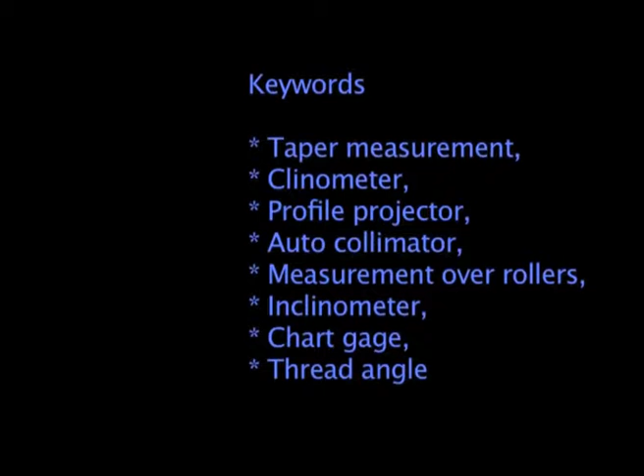In the last lecture, we discussed different kinds of instruments used for measurement of taper. We discussed bevel protractors, sine bar, sine center and sine table. In this lecture number 2, we will continue the discussion on other instruments used for measurement of taper, angle and tilt.

In this lecture, we will cover: external taper measurement using two rollers of same diameter, internal taper measurement using two balls of different diameters, and then we will learn about the clinometer, profile projector and auto collimator.

Now let us start the discussion on external taper measurement using two rollers of same diameter. In this photograph, you can see the tapered component, a taper plug gauge. The taper angle of this is to be determined.

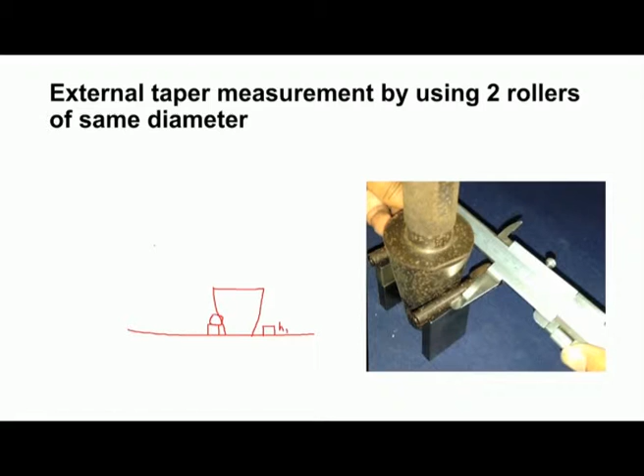We have the surface plate on which we keep the tapered component, and then we keep slip gauges of equal height, say height h1, over which we keep two rollers of same diameter. The rollers should contact the tapered component, and then we take the measurement over the roller. So this is M1.

Then we change the height, and again we keep two slip gauges of different height H2, and over these slip gauges again we keep the rollers. These two rollers should be in contact with the taper component, and over the roller we take the width M2 using a vernier caliper or any other appropriate instrument. Then using the relationships, we can find the angle theta.

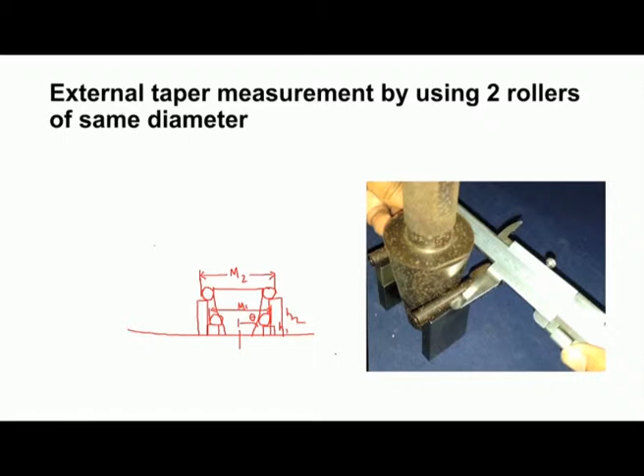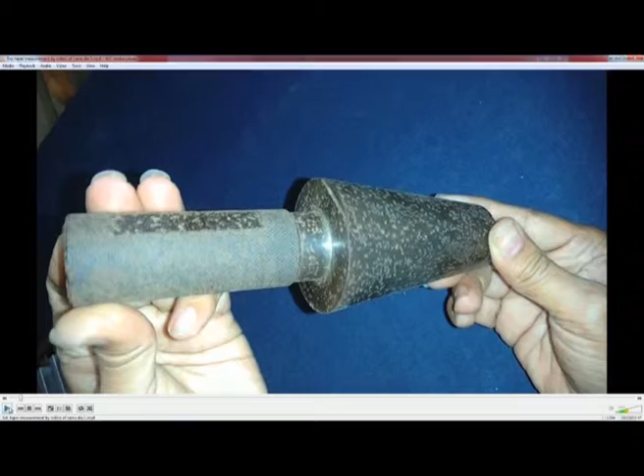Now we will conduct an experiment on external taper measurement by rollers, using rollers of same diameter. Now we can see the tapered component. The taper angle of this component is to be determined.

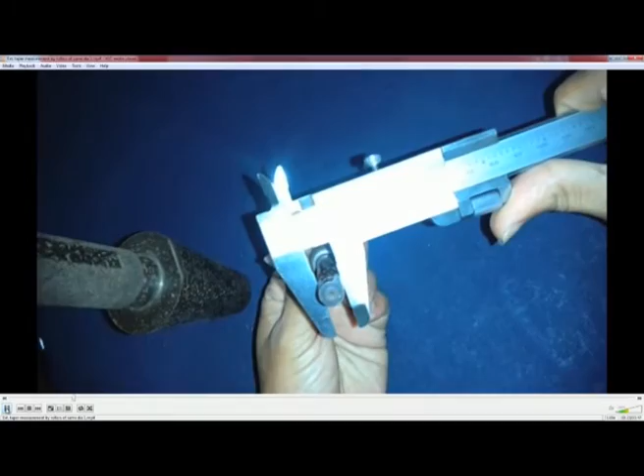Now we have to take two rollers of same diameter. We should note down the diameter of the roller. In this case, the diameter of the roller is 10 millimeters. So we have two rollers of same diameter.

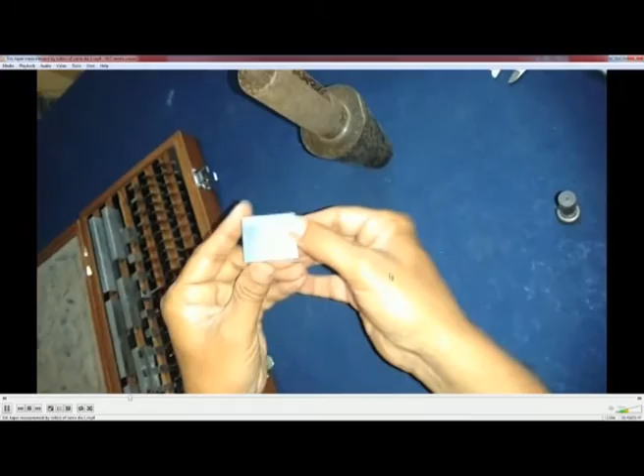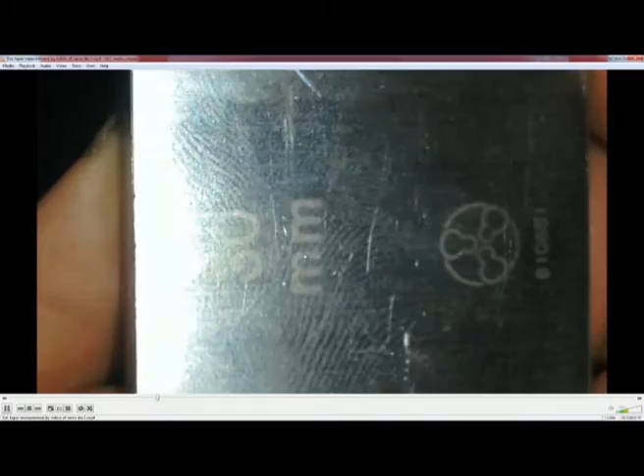Now we have a slip gauge of 30 millimeter height. We are taking two slip gauges of 20 millimeter and 10 millimeter thickness. We have to wring them together to build a height of 30 millimeter. And then we keep the two slip gauges.

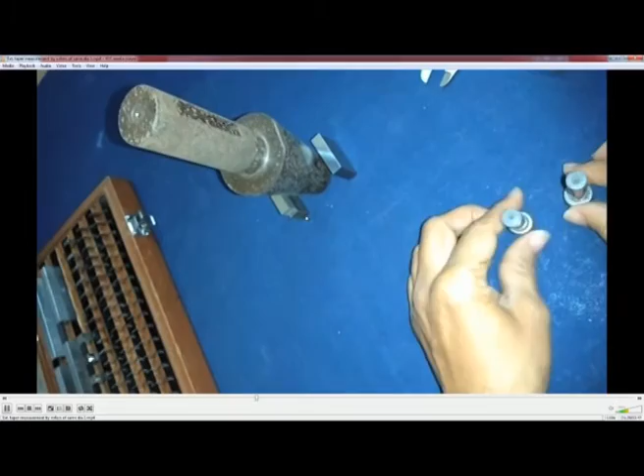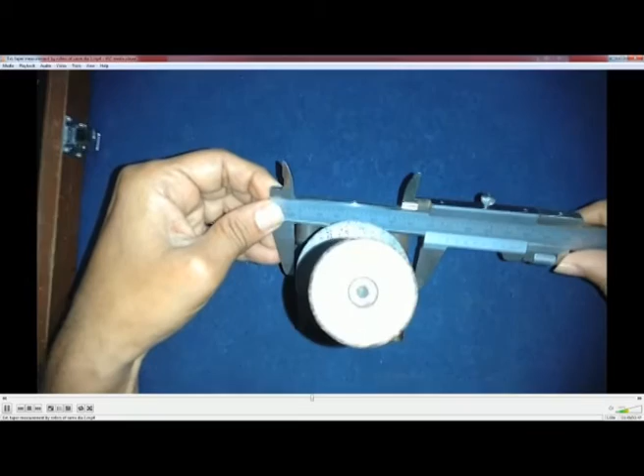Over the slip gauges, we place the two rollers such that they contact the tapered surface of the plug gauge. Now we have to take the measurement over the rollers. So this is M1.

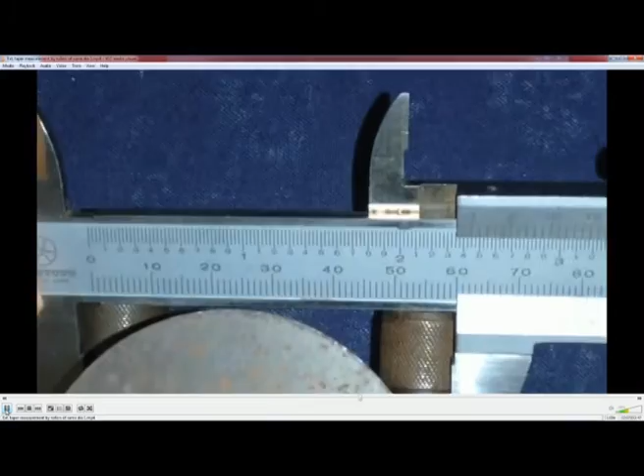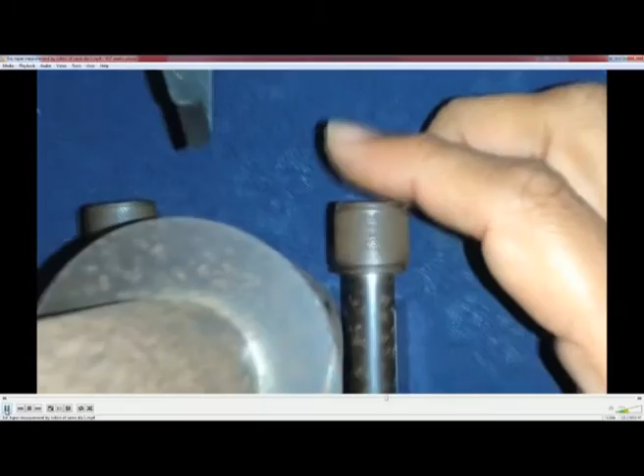I can see the reading is 62 millimeters. Reading is 62 millimeters.

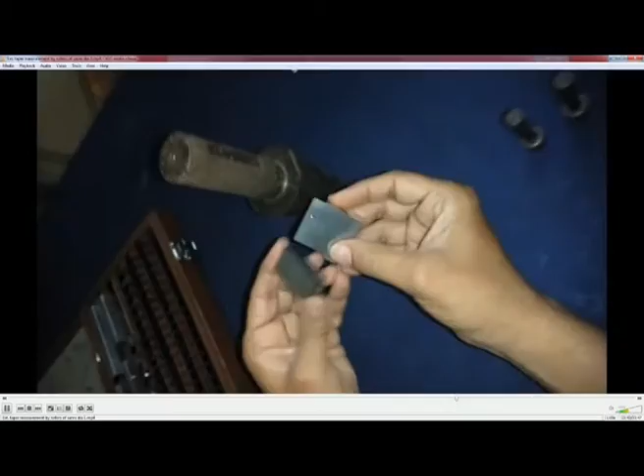Now we have to take another set of slip gauges. We are ringing two slip gauges of 30 millimeter and 20 millimeter thickness, so total height is 50 millimeter. So another slip gauge of 50 millimeter height.

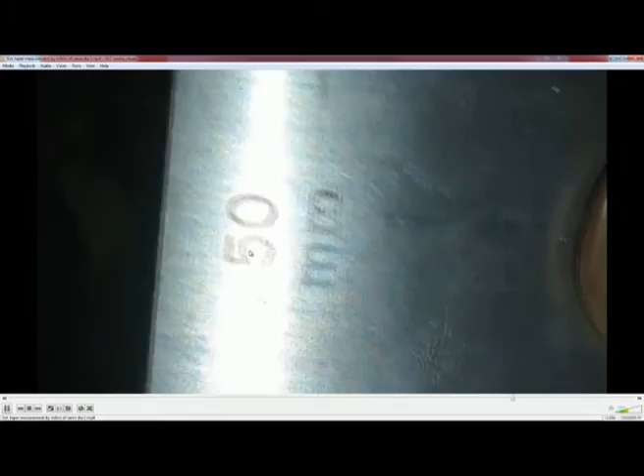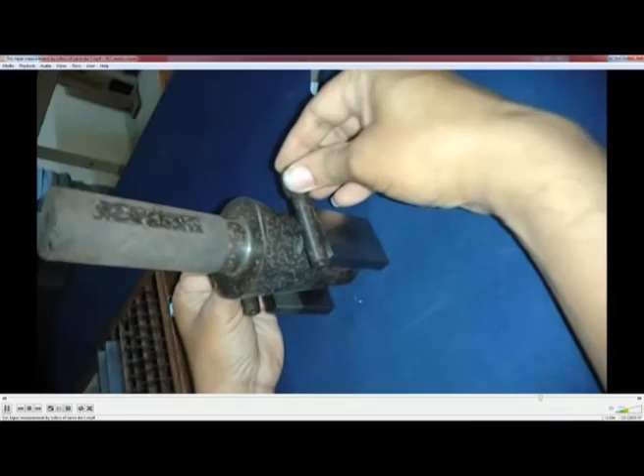Now we have to keep the two rollers on the slip gauges of height 50 millimeter, and over the rollers we take the measurement.

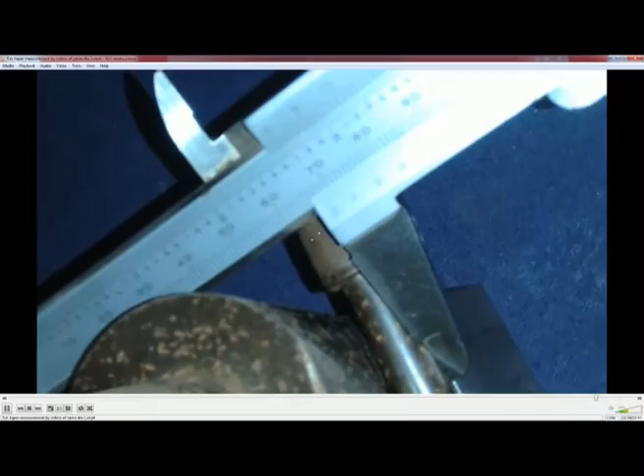Now the reading is 65, 66, 67... 67, and then we have to see the coinciding division. So the vernier reading is 67.8 millimeter.

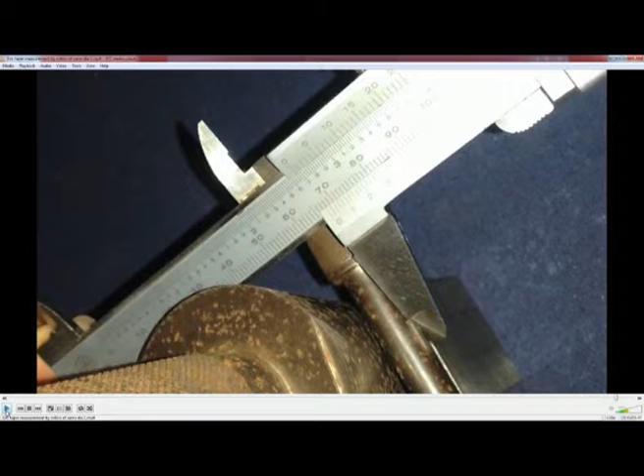Now we have recorded the observations. The roller diameter is 10 millimeter, and difference in height of slip gauges is 50 minus 30 equals 20 millimeter. Width over rollers at a height of 55 millimeter: that is 50 millimeter height of slip gauge plus 5 millimeter roller radius, so total height is 55 millimeter. At a height of 55 millimeter, the measurement over roller is 67.8 millimeter.

Similarly, width over rollers at a height of 30 plus 5 millimeter, that is 35 millimeter height, is 62 millimeters. So the taper angle is 16.5 degrees, that is 16 degrees 30 minutes, which is the taper angle of the component.

Now we will learn internal taper measurement by two balls of different diameters, using a depth micrometer. You can see the photograph here: this is the tapered component having internal taper, and we are using a depth micrometer along with two balls of different diameters.

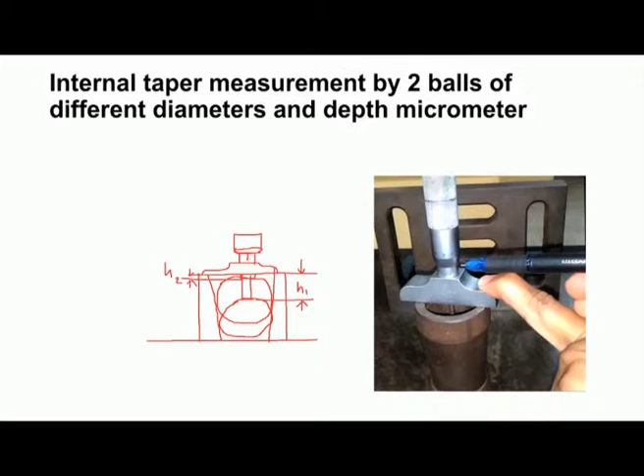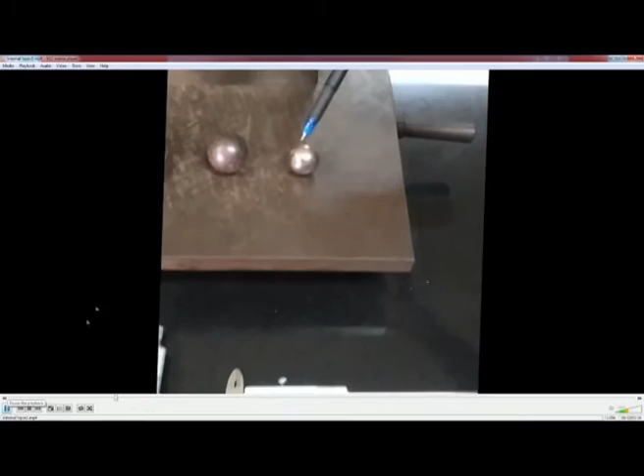Now we will conduct an experiment to learn the measurement of internal taper of a component. Now you can see the measurement arrangement. We have two balls of different diameters, a tapered component with internal taper, a depth micrometer with different spindles of different size, and a vernier caliper for measurement of diameter of balls.

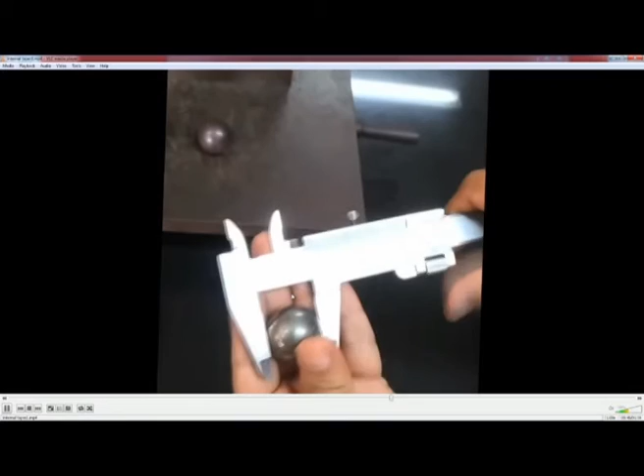Now I am measuring the diameter of the balls. You can see the diameter is 25 millimeter, and then we have to see the coinciding division. Now the diameter of the second ball.

You can see the tapered component. We have the internal taper.

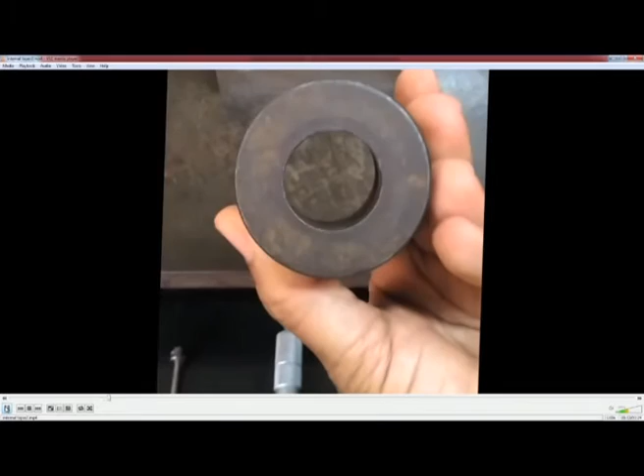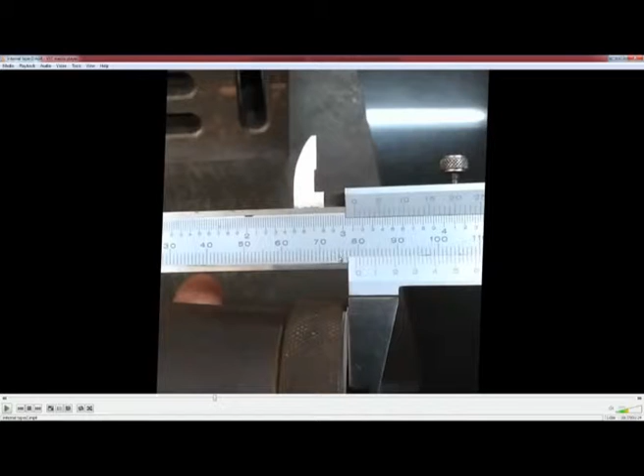I am measuring the total height of the component. So it is 79 millimeter on the main scale, and then we have to see the coinciding division: 5, 10, 15, 20, 25 - the 25th division is coinciding. So 25 into 0.02, that is 0.5. That is the total height of the component, 79.5 millimeter.

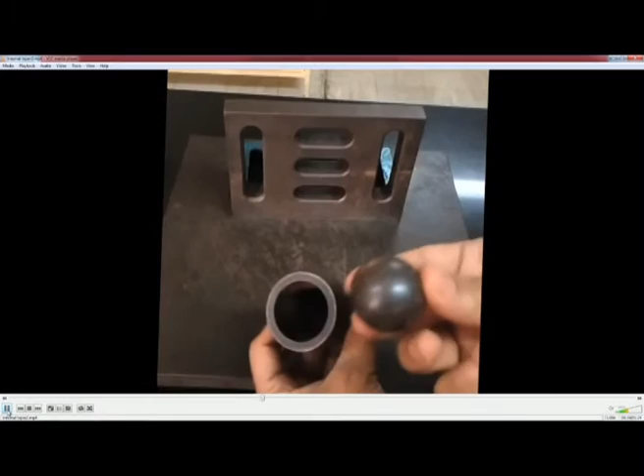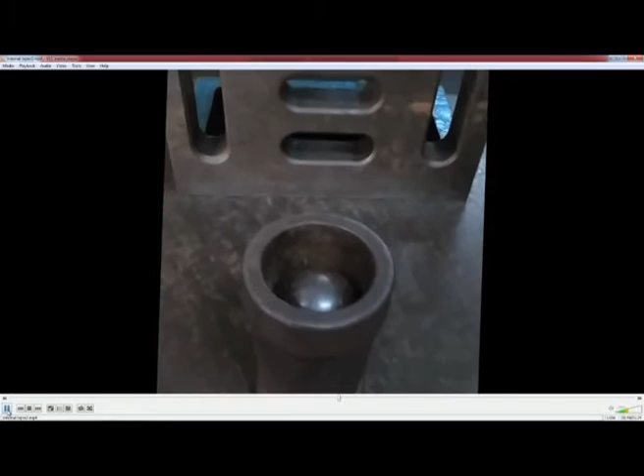Now we have to keep the ball in the internal tapered component, and then measure the height of the topmost point from this reference surface, and record what is the reading. You can see the spindle is just touching the top point on the ball. Then we have to note down the reading.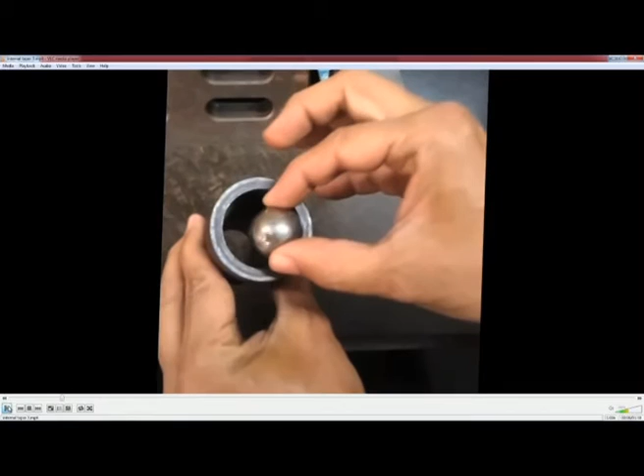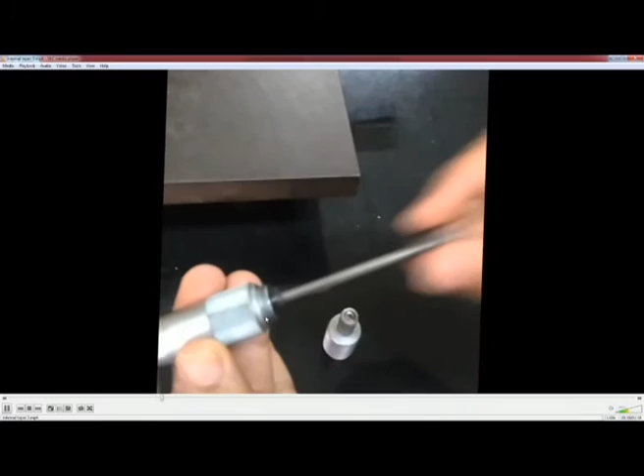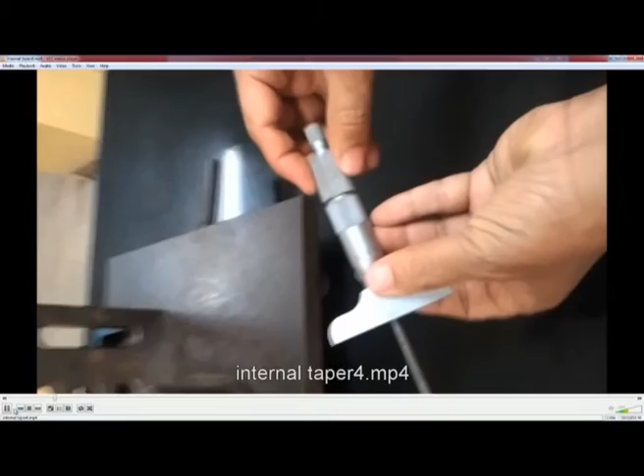Now we have removed the bigger ball, and now I am keeping the smaller ball into the tapered hole, and then again we have to measure the depth. I am changing the spindle, and putting the spindle of longer length. Now we can see I have inserted the spindle of longer length into the micrometer. Now I am measuring the depth. We have to note down what is the reading.

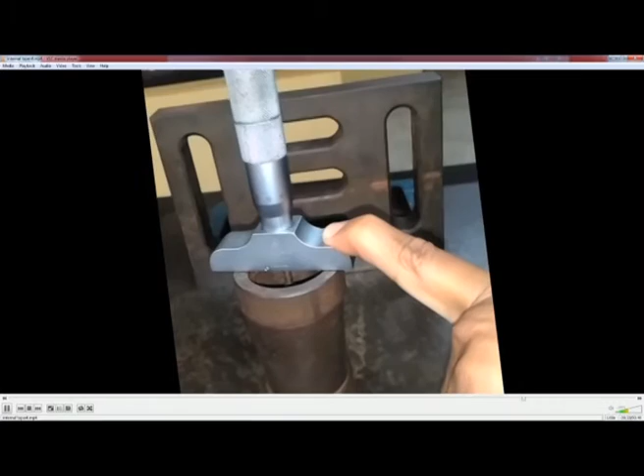Now, these are the observations after conducting the experiment. The diameter of the smaller ball is 25.4 millimeter, so the radius of the smaller ball r is 12.7 millimeter. Diameter of the bigger ball is 31.7 millimeter, so the radius of the bigger ball is 15.85 millimeter. Depth with the bigger ball is equal to 9.05 millimeter. Depth with the smaller ball is equal to 51 millimeter. So height of the component is 79.3 millimeter.

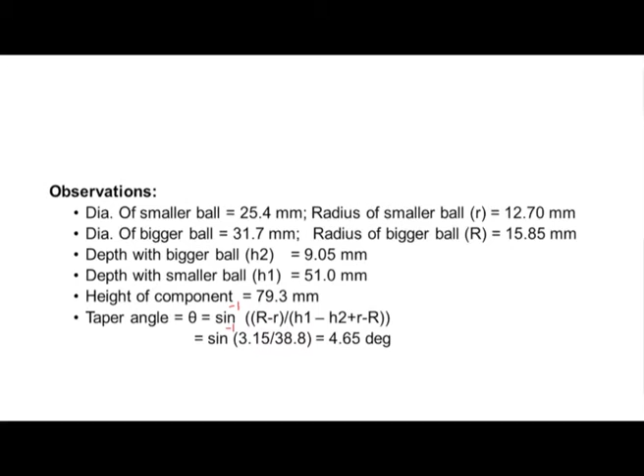So now we can calculate the taper angle using this relationship. So we get taper angle of 4.65 degrees.

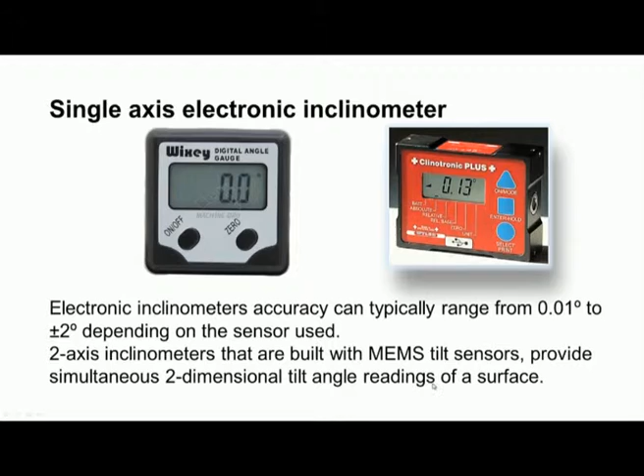This is another instrument with better accuracy. These electronic inclinometers' accuracy can typically range from 0.01 degree to plus or minus 2 degrees depending upon the sensor used. 2-axis inclinometers built with MEMS tilt sensors provide simultaneous 2-dimensional tilt angle readings of the surface, eliminating tedious trial and error when using single axis levels to adjust machine footings to attain a precise leveling position. 2-axis inclinometers can be digitally compensated and precisely calibrated for non-linearity for operating temperature variation, resulting in higher angular accuracy over a wider angular measurement range.

These 2-axis inclinometers with built-in accelerometer sensors generate numerical data tabulated in the form of vibration profiles. It enables machine installers to track and assess alignment quality in real time and verify structure positional stability by comparing machines' leveling profiles before and after setting up.

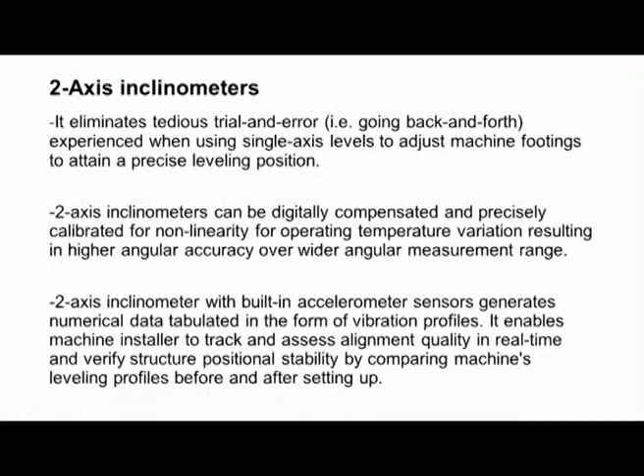Now let us move to another very important instrument used for measurement of angles, that is profile projector. This profile projector, optical profile projector, is a versatile instrument widely used in many phases of quality control. It has made possible the effective measurement of great numbers of components which, because of size or dimensional characteristics, pose serious difficulties to other measurement methods.

For example, if the workpiece is very fragile or very thin, it is not possible to use other types of instruments for measurement of such a component. In such cases, this profile projector will be very useful. So these are also known as contour projectors, optical comparators, shadowgraphs, micro projectors, etc.

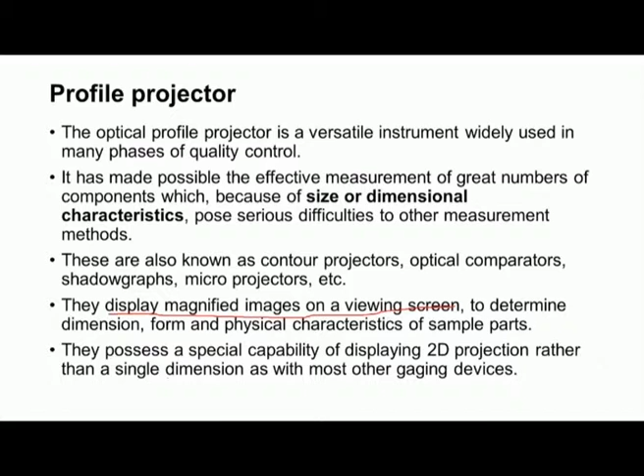They possess a special capability of displaying 2D projection. Other instruments like micrometer or vernier measure only one dimension at a time, whereas these profile projectors at a time can display a 2D projection rather than a single dimension as with most other gauging devices.

Now these tables, in some cases, are stationary, and in some models they are movable. We can move in the x direction or y direction, that is, parallel to the column or perpendicular to the column. Sometimes they can be rotated. This rotatable table is very useful when we use the optical projector for measurement of angles, for example screw thread measurement. And sometimes the work tables can be moved up and down for proper focusing.

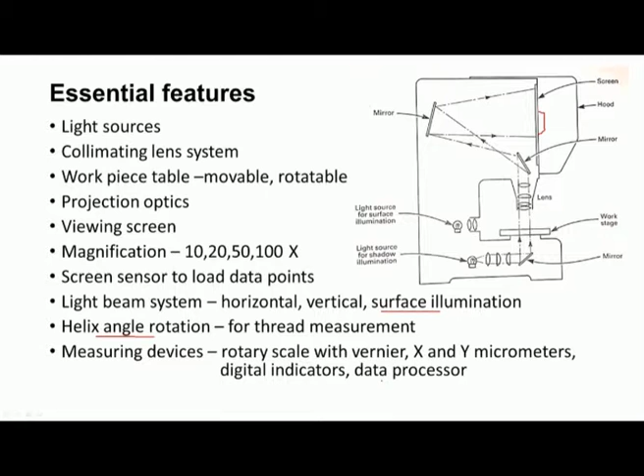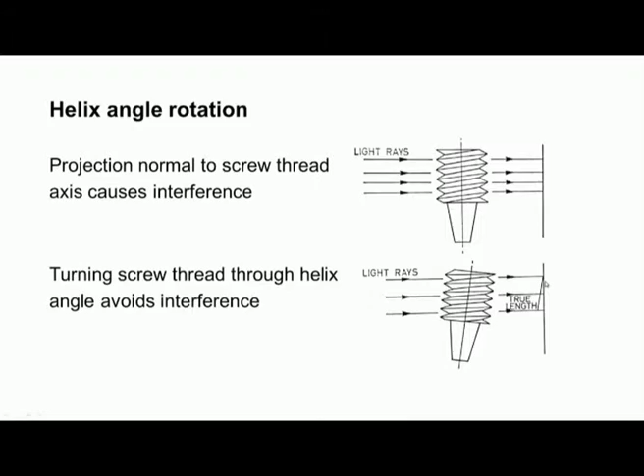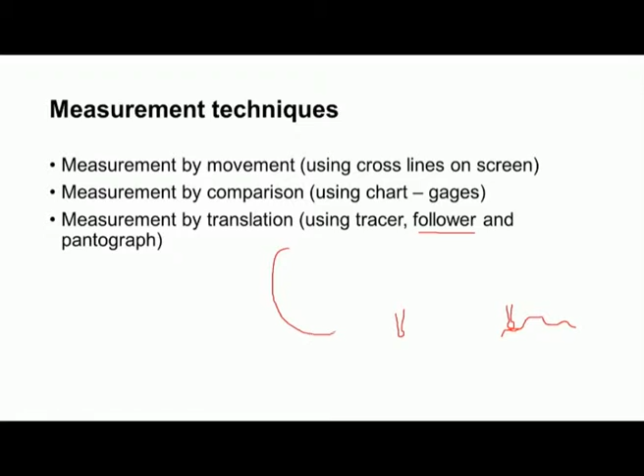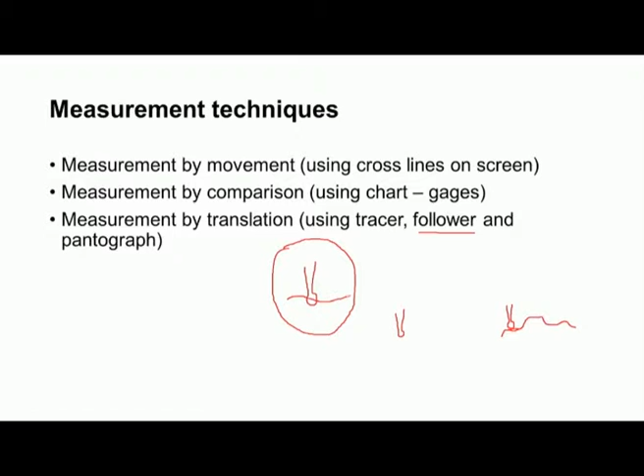This follower is projected onto the viewing screen. So the projected image of the follower will be like this, and there will be a chart with 2 contour lines, one maximum size and one minimum size. So when we move the tracer onto the workpiece, the follower will also be moving. If the image of the follower moves within these 2 limits, then the workpiece is accepted. So this is measurement by translation.

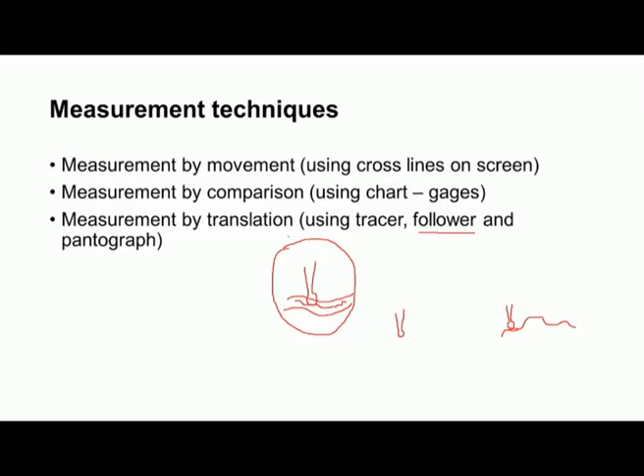Now we will see a profile projector. Now you can see a profile projector.

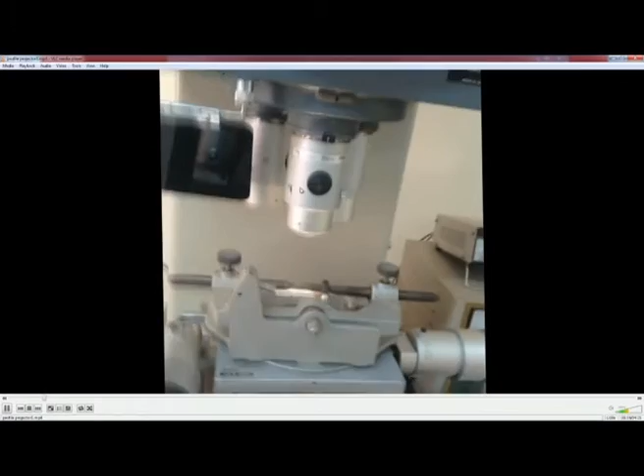This is the viewing screen with protractor ring. Now this is the magnifying lens 20x, and then you can see another magnifying lens of 10x, and you can see the light source for surface illumination purpose.

We have to keep the workpiece on this glass plate. This is the table, work table, and this is the glass plate on which we have to keep the workpiece. When we want to study the surface characteristic, we should use surface illumination. That means light will move like this, and here it will be tilted, and then again it gets reflected, and then the image we get on the viewing screen.

This is the turret. In this turret we can mount 3 magnifying lenses. This turret can be manually rotated to bring the magnifying lens of appropriate magnification in line with the workpiece.

Now we can see a fixture. This is a fixture to mount the screw thread. We have the 2 centers, and these centers can be moved in and out. The clamps are provided to fix the centers at the desired location.

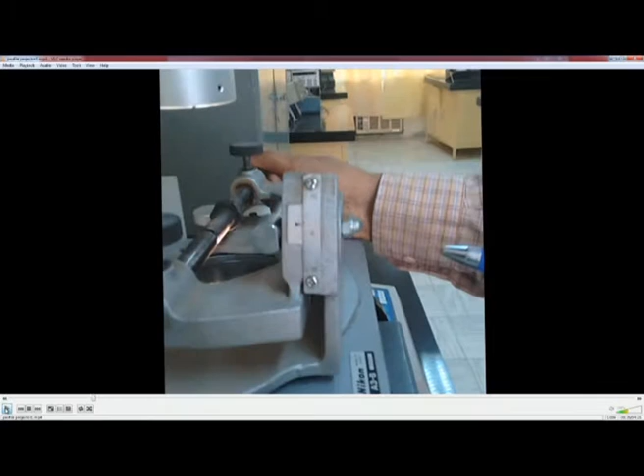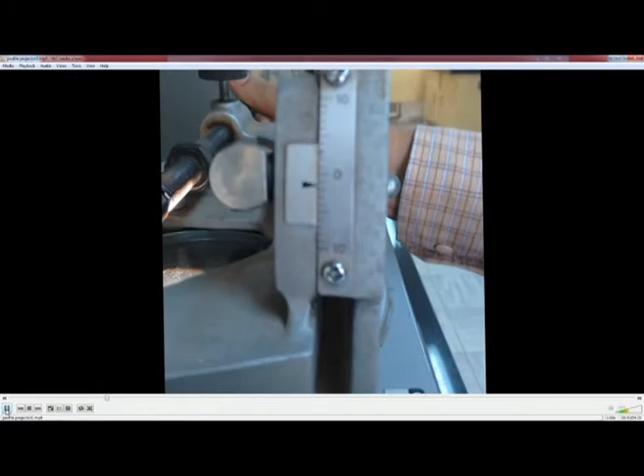And then you can see there is a pivot here. This is the pivot. We can tilt the screw thread by the helix angle, so that we get a clear image, and that angle also we can see here. What is the helix angle rotation, we can see by using this scale. Now we can see the helix angle rotation facility. This is the reference. On one side we have up to 10 degrees and on the other side we have another 10 degrees.

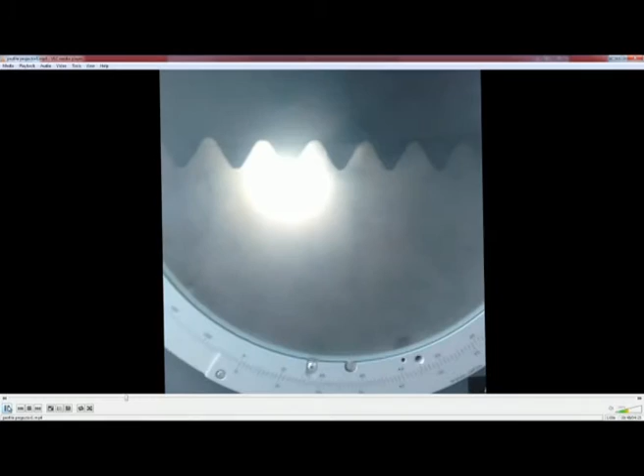Now you can see the projected image of the screw thread, and you can also see the protractor ring here. This is the 0, and in the anti-clockwise direction it is 5 degree, 10 degree, 15, 20, 30, 40, it goes up to 350, 355, 360, complete 360 degree rotation it can measure, and then we have a vernier. So each degree is divided into 60 parts. So the least count of this arrangement is 1 minute. So 1 degree is divided into 60 parts, and least count is 1 minute.

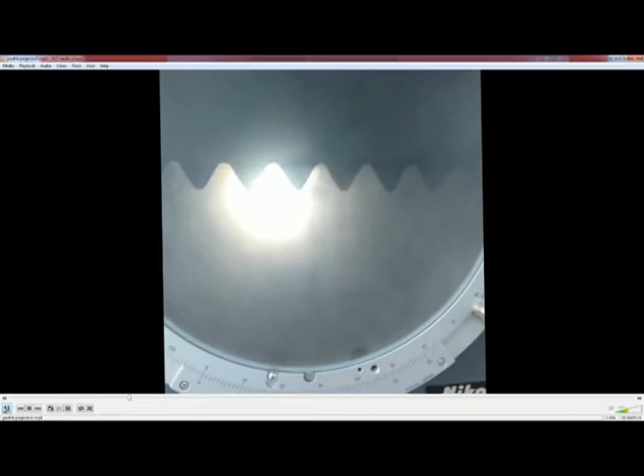Now you can see this is the main switch, and this is the switch to activate the surface illumination. By operating this switch we can have the vertical illumination system to get the shadow of the workpiece. And again we can select high intensity light or low intensity light depending upon the requirement.

Now this is the pivot of the helix angle rotation arrangement, and this is the workpiece. You can see the light, it is passing through the workpiece. You can clearly see the screw thread, and this is the glass plate.

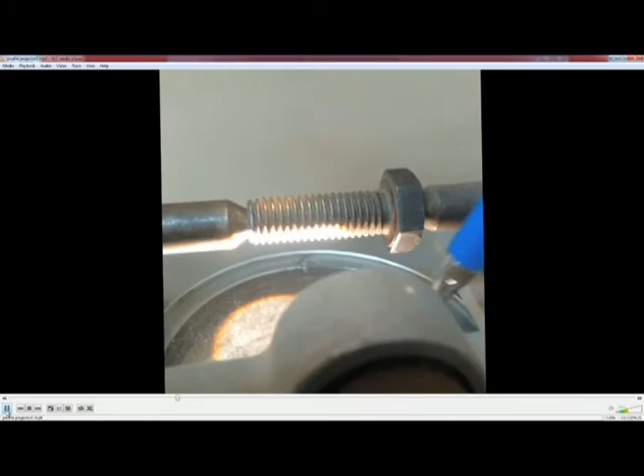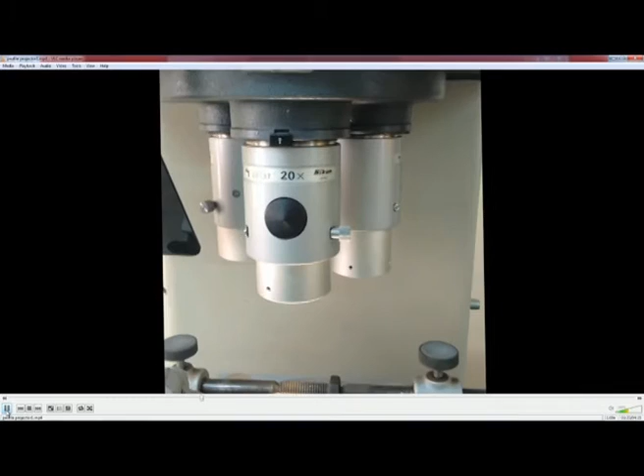It's a 20x magnifier.

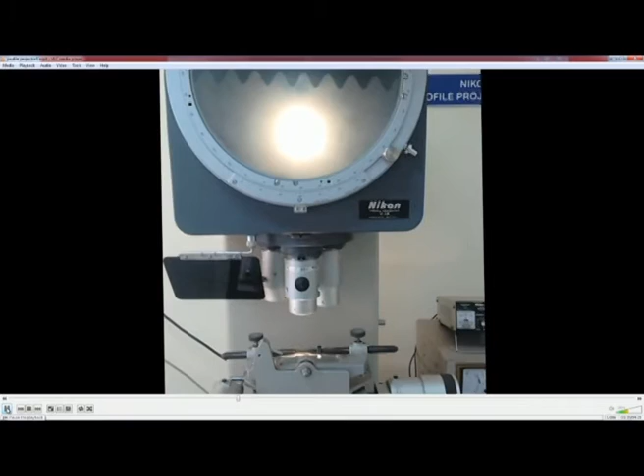Now you can see the data processor microprocessor attachment. We have to load the data points into this microprocessor, and then by selecting appropriate keys we can get the radius, diameter, angle, major diameter, minor diameter, etc.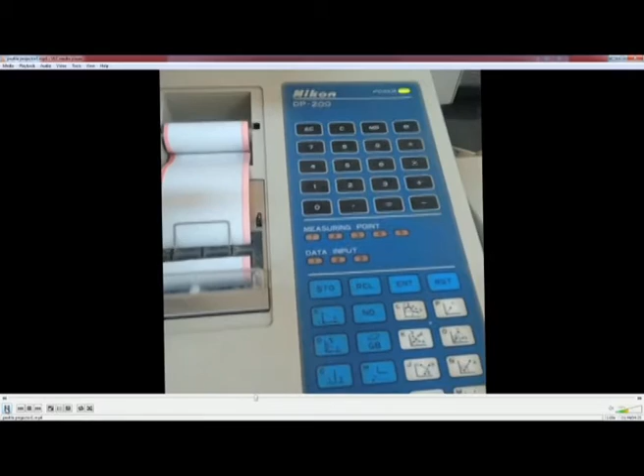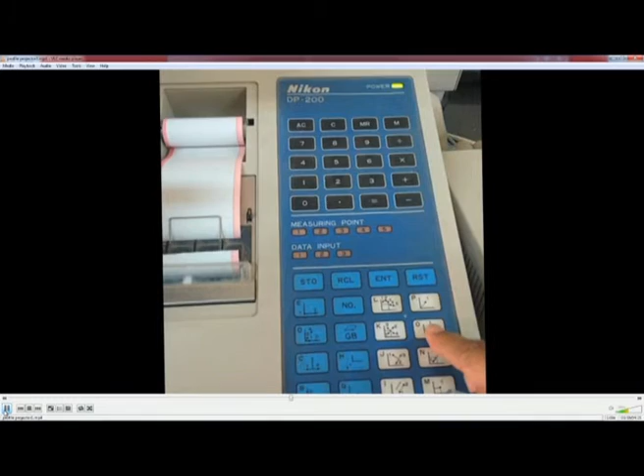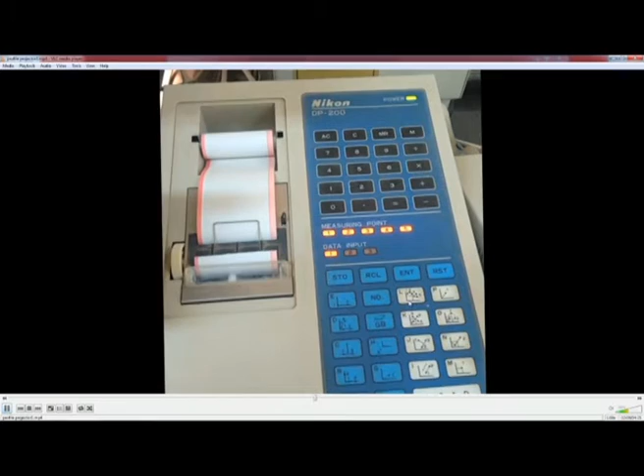You can see the various function keys here. To find the included angle, we select K, and to get the diameter of a component we have to select O, and to find the radius we have to select L. And then if we want to find the distance between a point from a line passing through 2 points, we have to select this key J. Now, if you select L, 5 measurement points are required.

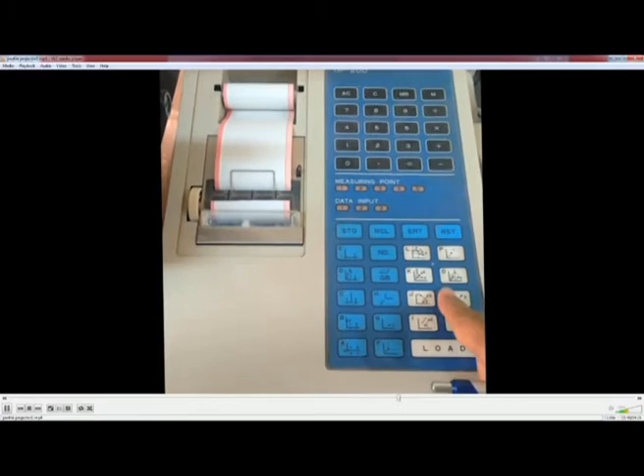Now you can see the display unit. This is x micrometer and y micrometer. Now they are set to 0.

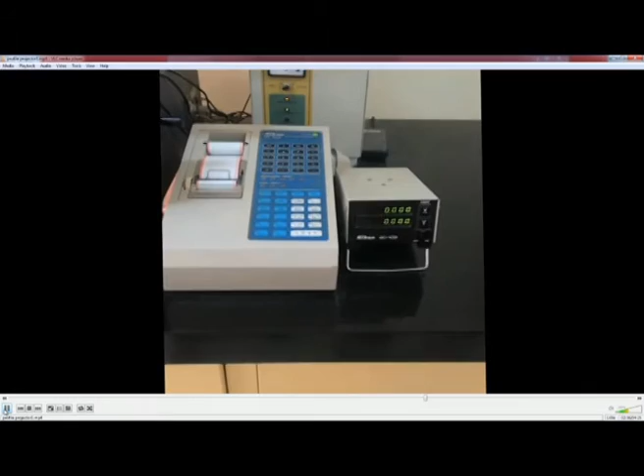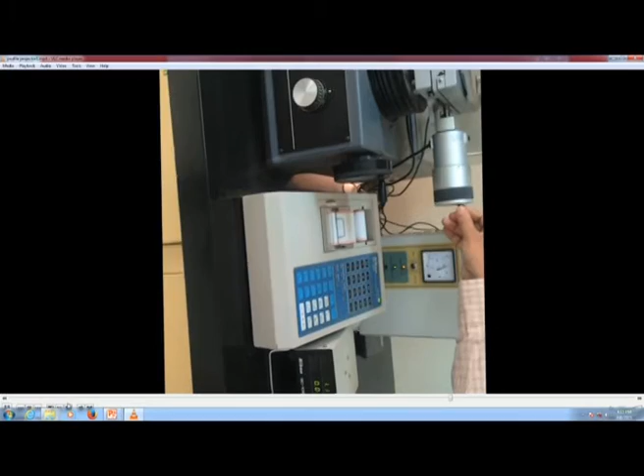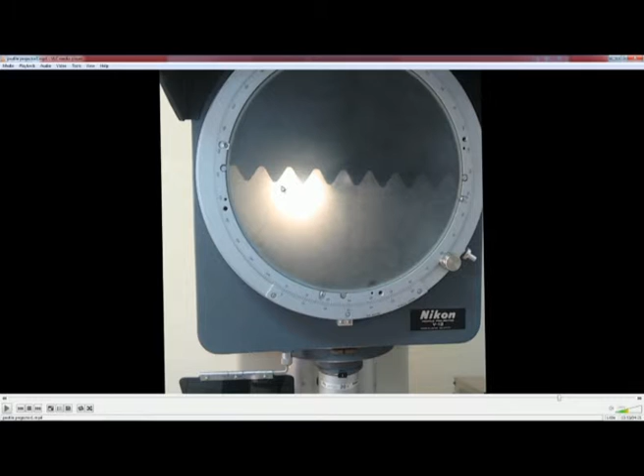By operating the micrometers, when we want to measure the pitch, we should move the vertical cross line. We have to make the vertical cross line pass through this point, note down the reading, then move the vertical cross line to this particular point and again note down the reading. The distance gives the pitch. Like this we can make the measurement.

Finally, the data processor will process and give the result. Now you can see we have measured the thread angle, it is 56 degrees 54 minutes.

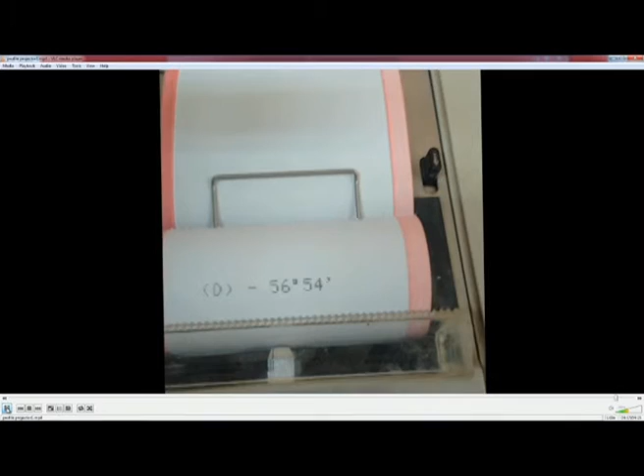Now we can see thread angle measurement using the data processor. We should select appropriate processing function keys. Thread angle measurement is like this. Say we have...

A profile like this. We should load totally 4 points. 4 points are needed. We have to select the key K, and then input 4 points. First point, second point, third point - 4 points we select on the flanks, and then input these 4 points. The data processor will process these 4 data points and finally print the intersection angle.

Similarly, in order to find the diameter of a component, we have to feed 3 data points - first data point, second data point, and third data point. Like this we should give 3 points. In that case we should select the key O.

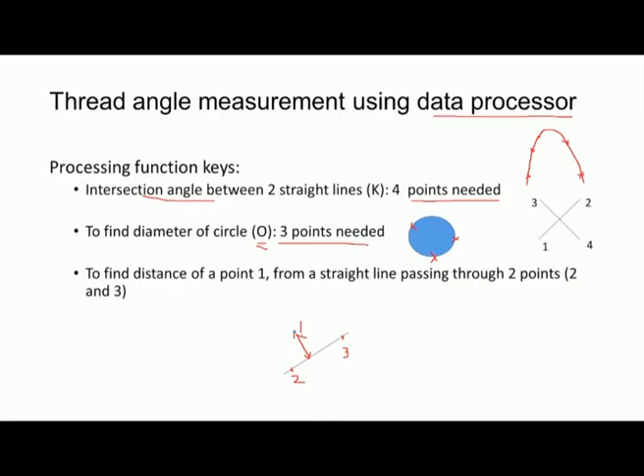Similarly, we can find the distance of point 1 from a straight line passing through 2 points, say this is point 2 and this is point 3. So what is the distance between the point and this straight line passing through these 2 points? That we can find by selecting the appropriate key.

Now you can see here thread angle measurement using circular scale and vernier. We have a circular scale here, this is the circular scale or protractor ring, and this is the vernier scale. One cross line should align with one flank, and we take that reading. Then we rotate the cross line to make it parallel to the other flank, and again take the reading. The difference gives the thread angle.

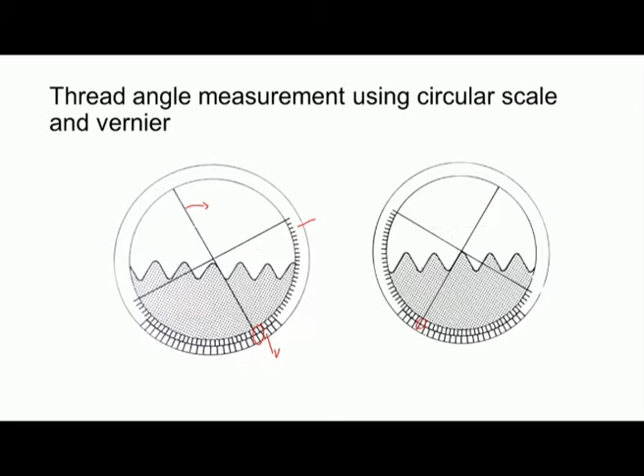Now we will conduct an experiment to show how to use the profile projector to measure thread angle. I can see the protractor ring, it is showing 30 degrees, 40 degrees, 50 degrees, etc., and this is the vernier. The least count is 1 minute.

Now the reading, when the cross line is parallel to one flank, the reading is 33 degrees and coinciding division is 25, giving 33 degrees 25 minutes.

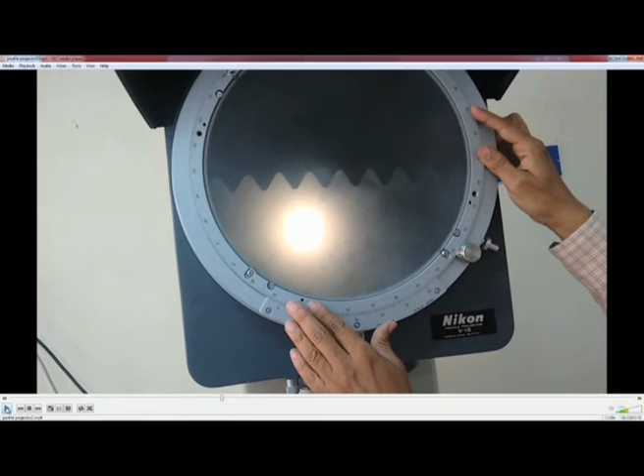Now you can see I am rotating the screen so that the cross line becomes parallel to another flank. Now it is parallel to the other flank, and again we have to note down the reading.

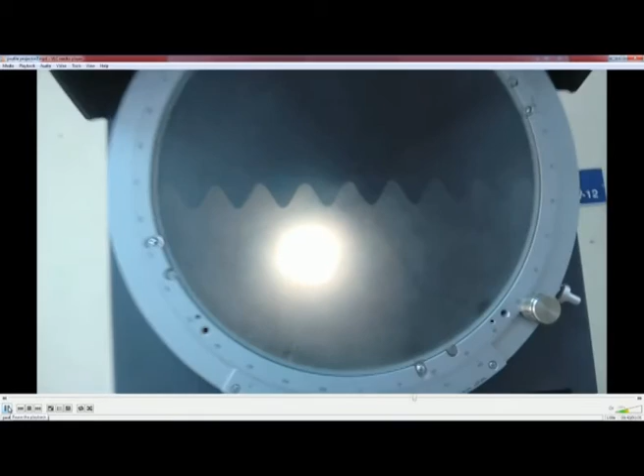Now you can see the reading is 332 degrees 20 minutes. This is the reading. The difference we should take to get the thread angle.

Now you can see the observations. First reading is 33 degrees 25 minutes and second reading is 332 degrees 20 minutes. We have to deduct this from 360 degrees: 360 degrees minus 332 degrees 20 minutes equals 27 degrees 40 minutes. The thread angle is obtained by adding this 27 degrees 40 minutes with 33 degrees 25 minutes, giving a thread angle of 61 degrees 5 minutes.

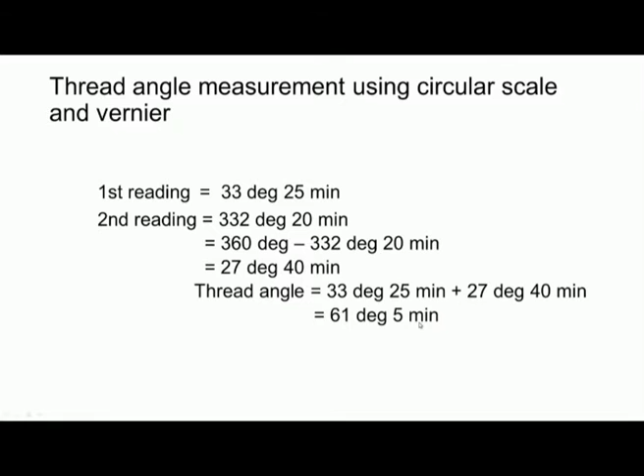So like this we can use the profile projector for measurement of thread angle.

Let us see what are the cost advantages of using a profile projector. If the components are very fragile or very thin, other measuring instruments cannot be used, so this is the only option. If the workpiece geometry is very complex, multiple settings are required if you use other instruments like micrometer or vernier caliper, whereas with the profile projector, in a single setting we can measure multiple dimensions.

2D measurement is also possible. In conventional instruments and gauges there is a problem of wear - frequently we have to check and replace the gauges, whereas with optical gauging there is no wear of the light beam. So the optical gauge is not subjected to wear, and the frequent checking and replacement problem will not be there.

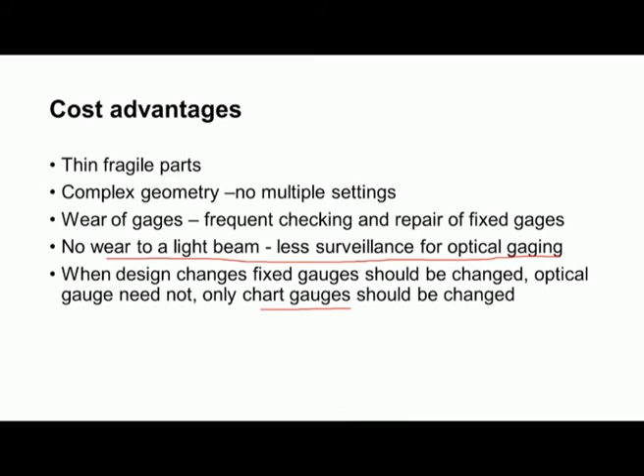When the design of the workpiece changes, fixed gauges should be changed and a new set of gauges purchased. In the case of optical gauge, we need not purchase a new profile - the same profile projector can be used even when the design of the workpiece changes. Only the chart gauges we may have to change. Like this, the profile projector offers many cost advantages.

So with this let us conclude this module 8 lecture 2. In this lecture we discussed the various instruments used for measurement of angle like clinometer, and we also discussed the profile projector, the various measurement techniques of the profile projector, and the cost advantages of the profile projector.